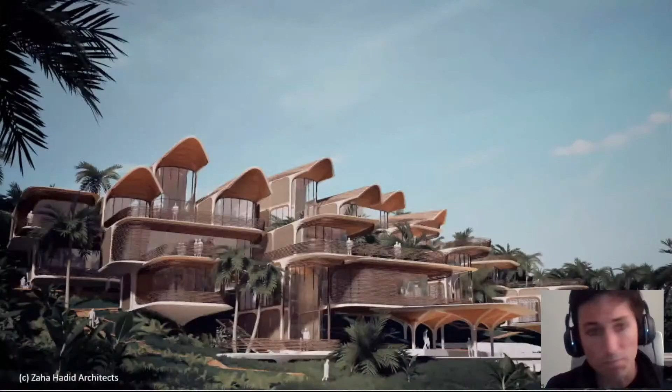Absolutely, sounds great, Jeff. So let me jump into it. So generally on our workflows, we tried, when in Zaha Hadid, we're very design oriented, right? So we try to make sure that all the outputs look great, and then how can we curate those outcomes? This is the project that I was mentioning in Roatán in Honduras.

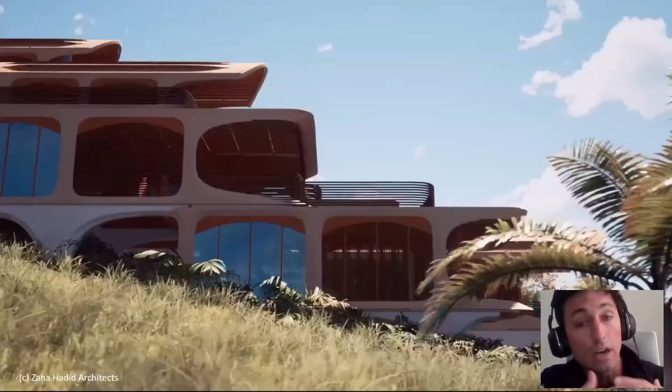So at the beginning, we kind of set up a scene, and Twinmotion in this case is where it really is great to set up something quickly and just get a feel of how that place would be. At the beginning, we don't really know how it's going to turn out. So this was the hypothesis with this project.

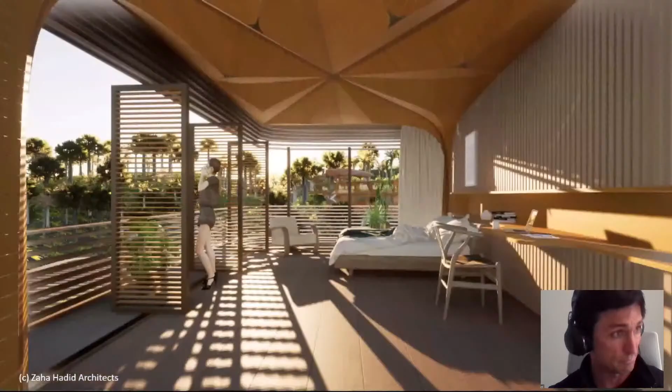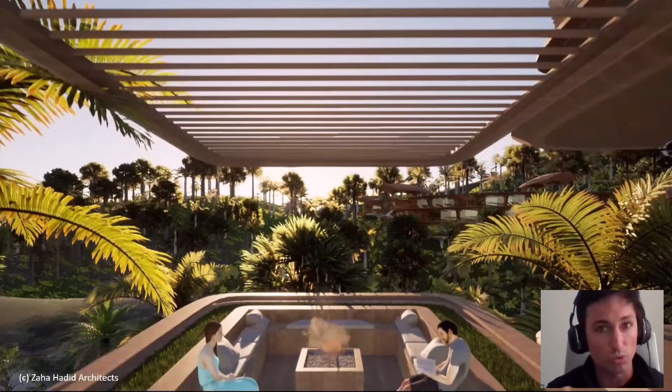Just trying to lay out some of the system design just to allow people to configure, but we needed to make sure that the mood that we take from the scene is curated enough to the standards of a Zaha design. So not only exteriors that we can control quickly with Twinmotion, we can also do all of these kind of scenes where you get real-time lighting and people dynamics, just to get a feel of that user participation.

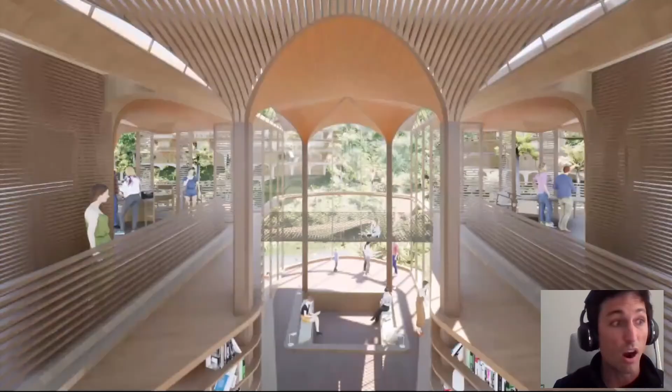That's what it's really most exciting, right? Like constructing those spaces, and putting ourselves in different times of the day on how we can appreciate the lighting conditions, and these game engines and Twinmotion are being really pivotal in those early design studies.

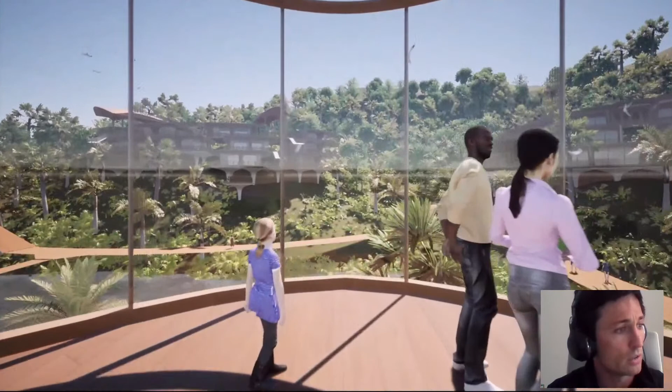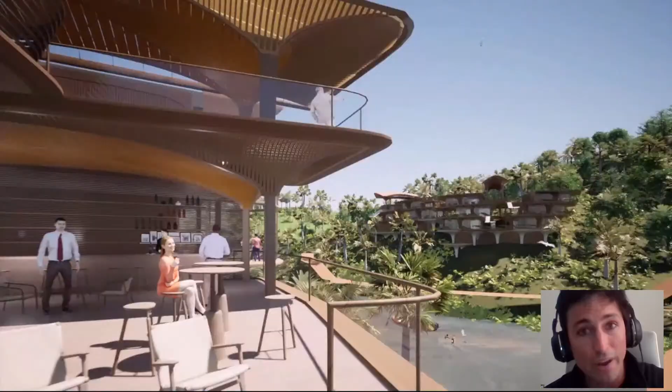So these are some previews of how we show it up in those early design studies, just to make sure again that we're capturing the right intention. After we have the actual feel, we then break all of these into a kit of parts. And believe it or not, everything that you see here on the screen is just a kit of parts. Everything is modular, so that's what makes it interesting.

Then how can we interface it, and how can we encode the rules to create not only the communities, but also make it available on our configurator. And then all of what we extract from the configurator is data that we can bring back to software such as Rhino or Revit in this case. So that's why we try to keep it a little bit agnostic in that sense.

So we lay out a little bit the system grid of that design intention, and then we voxelize all the space, all that initial. We run analytics, environmental analysis, views analysis, and how circulation and different types of units can work.

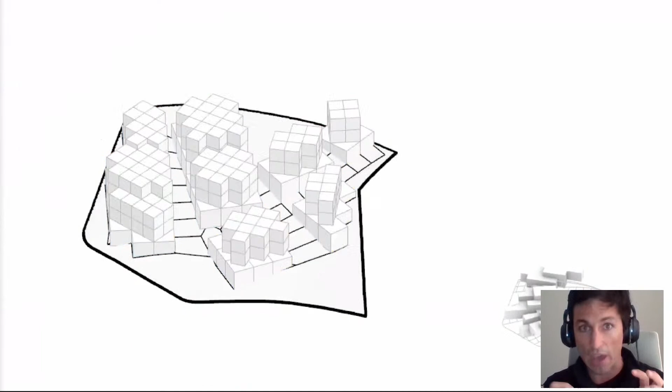So we can jump a little bit into a live show of how that configurator looks and how people on this island are configuring their units. Let me actually share, because it's all also made with Unreal Engine, and then we can plug in.

So this is cloud hosted. It's running on a local server right now, on my machine, but this is being deployed on the web. So I'm gonna put just Jeff -- let's make your unit, Jeff, in real time.

Yeah, so once we log in, I'm gonna have some instructions over here, and then we jump directly into the scene. So this is what's presented to potential buyers in this case, and then we can really adjust the scene very quickly, thanks to Unreal.

The first thing that they can choose is where the users want to place their cluster, like their actual unit, and then they can see, for example, this is another building that is going to be on site.

So whatever you see, the sea -- people can start actually understanding the distance to the sea, and the views that they are getting.

So let's say we want to choose that location, then people can say, okay, I want my unit to be on top of the stack. So let's select this one.

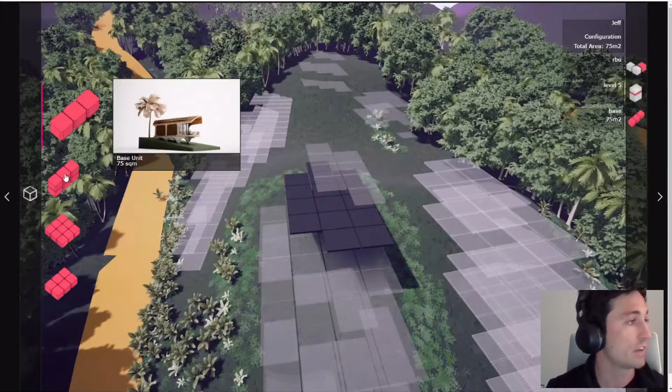Now I can start checking. I can choose between different types of units. This is a 75 square meter, this is a 150 square meter unit. Let's go with a wide one, maybe like 225.

That sounds about right. And then you see, depending on it, the system is intelligent enough that it shows you where you can place it, or where you're off limit.

So once we say, okay, now this one is I'm allowed to place here, it tells you already some data out of that position -- the distance to the closest building, the distance to the road, the actual unit area, and the distance to the sea.

So if people want to have a unit closer to the sea, they can also select that. And then once they place their unit, they can start also customizing air rights.

Like when we do this voxel, the system grid, they can also say, okay, I want to buy air rights for future expansion, so no one will be able to place above me. So I'm going to have my full terrace for me, or I can start adding some spaces on the sides.

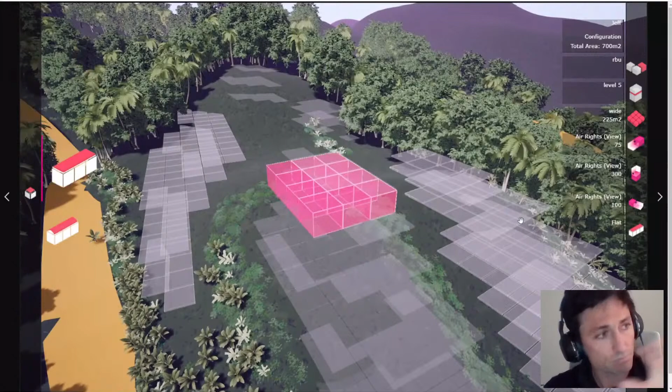Let's say I want to have only the left side because this side is clear, and I don't want any of my views being obstructed by anyone in front of me. So I buy all those air rights, and now I can get into the property, into the unit.

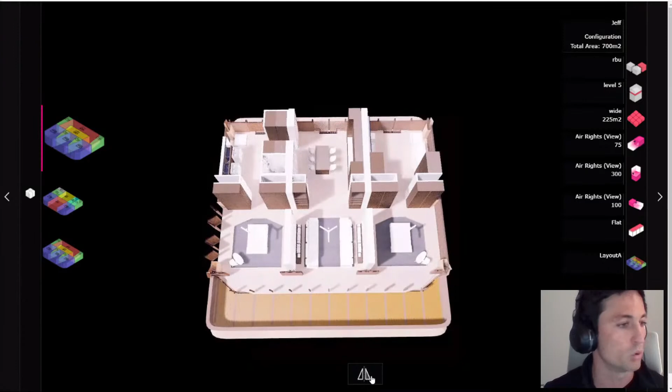So when we get inside, we can also customize the layouts, and depending on whatever they select -- let's say I'm gonna go with the first one, have some of the bedrooms facing towards the front. If they want to also flip the layout, they can do it from here.

And now once we get into the actual unit, they can start seeing how is the view from that unit -- I see there's no obstructions, I get a clear view on the right.

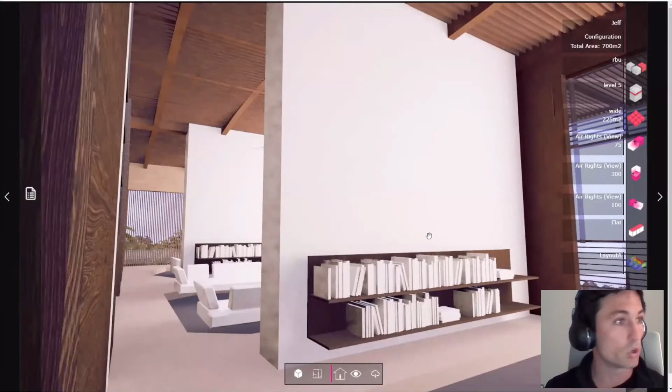Now I'm in first person, because again, this is almost like a game that I can start just walking around some of these units. And we can also go to the interior and see how that looks and start walking through. With Unreal Engine's ray tracing technology, we can have real-time lighting on the interior.

And then once the unit -- let's say Jeff is satisfied with this unit -- we can download that summary, and it shows it already downloaded.

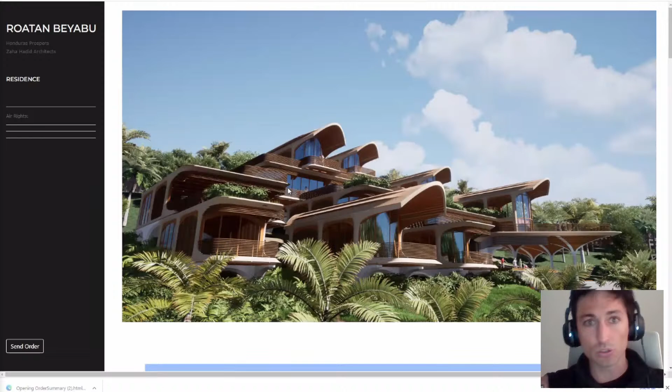Uh-oh, looks like we lost Cesar. I'll see if he comes back. I was checking out the chat while it's loading.

Stefan Pinedu, look at that. Nice last name, dude. Someone's asking if he's using Revit with Twinmotion. We can ask when he comes back.

That was definitely Twinmotion on the initial animations, and then the configurator is in Unreal, which there is... oops, sorry guys, let me just go to the 2K screen. We're gonna have to link them back in. Hopefully Cesar has no problems joining us again.

The configurator is running on the web using Unreal Engine as the backend, which I'll have to ask about. But there is a connector, a bridge between Twinmotion and Unreal, so you don't necessarily have to lose everything you did in those initial renderings and animations, as you saw there.

Check it out, let's see. I was checking out the chat while we wait for hopefully Cesar to come back. I'm wondering if maybe the Unreal thing broke it, but he said it was running on a local server, so maybe not. It's actually a Zoom call that him and I are on, so definitely something to do with potentially the Zoom call. Let me just keep checking out on here.

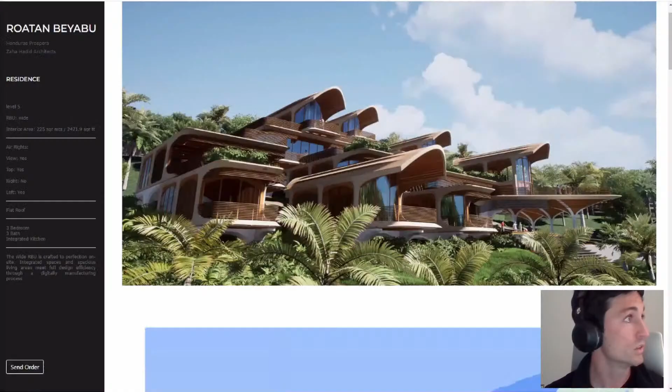All right, sweet. So we made my unit, and now you're running through a little summary here. After we did the configurator, we downloaded our order, and this is a brochure completely tailored to what the user said - like it's going to be on level 5 of the stack.

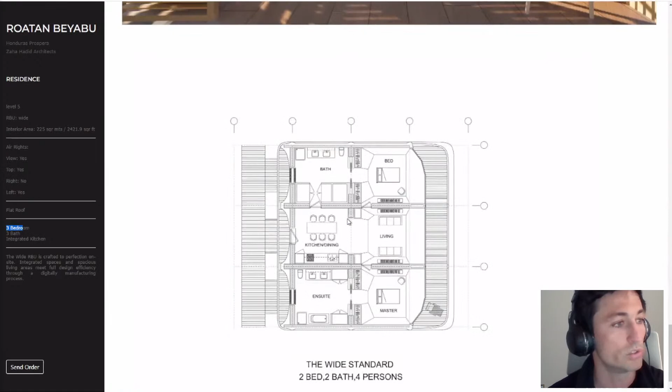It's a wide unit, 225 square meters. Then which air rights were bought, how many bedrooms and bathrooms are on that specific customized unit. There's also some information on the local site that the developer wanted to engage with, plus some conceptual images of how the unit would look in the interior and the floor plan.

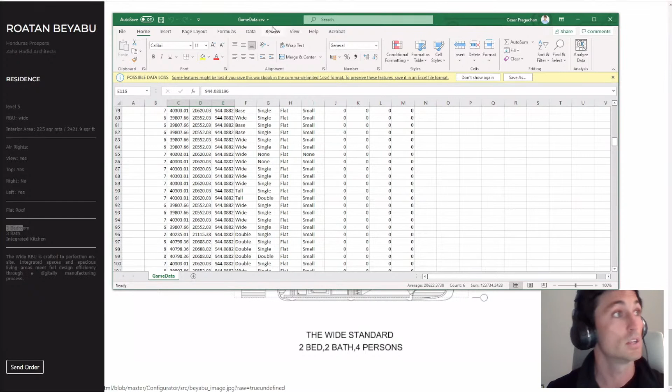So it's tailored, and what we get out of this is basically the data - different configurations run through different users, all encoded. So it's a wide single unit, with the transformation matrix, position and rotation of that unit. With this information we can reconstruct it and bring it back to any other software model.

Even when we start breaking down a unit, this is what I can share - just to understand how it looks. These are all the kit of parts that we model.

Based on that, they get swapped - if you want a large terrace, if you want a roof - all of that is deployed on the system. So this is a bit of that information.

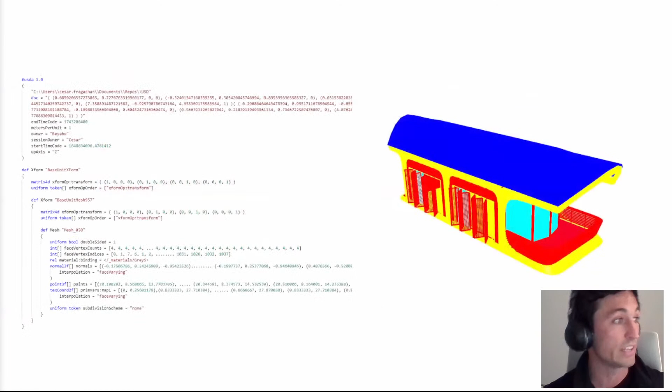This is the USD format we're currently exploring - from one unit that we model, this is the computational representation of that unit in space. So the configurator knows in the back end that if it has a yellow color, it will deploy it as a wood texture; if it has blue, it gives more of a thatched roof texture, and glaze in cyan.

With this kind of computational data we can start reconstructing everything. We can take it to the configurator, but we also export it back to Revit or Rhino, and continue refining it from there for structural engineering and whatnot.

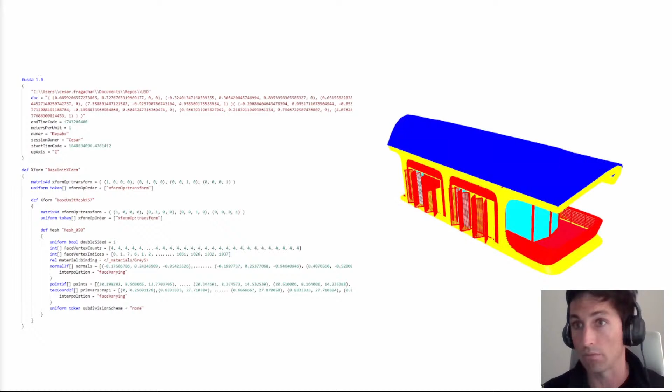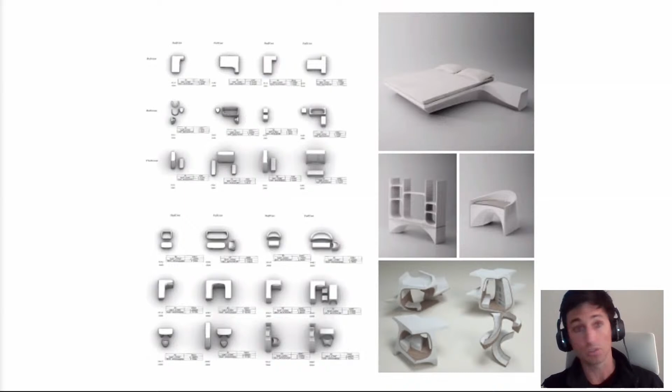And then of course, all of these are made available in Unreal, ray traced. This is a little bit of the configuration in place. We try to make sure that, I mean, we're architects, we're not experts in UI design, but it's something important. How do we present all of the data in a UI friendly format?

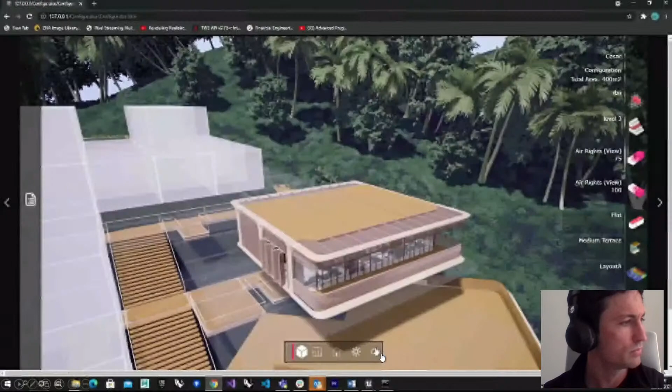Right, so real-time ray tracing. Some of these videos are not actually playing right now, but that's awesome. This is a little bit on how our workflows work.

No, that's great. It's an interesting approach in the sense that, at least in my mind, I'm connecting all these dots of how this changes the typical process. As an architect, I'm sitting there thinking this is a really cool idea, and obviously a space like this, I think you can probably enforce more rules initially on, is a simple example of it, right? Obviously the more customized the building gets, the harder something like this is. But then my question on the back end, the design process to set up these rules, what did that look like for you guys?

You obviously have to bake a lot of rules into this configurator. So was that something where that was mostly the architects, the design team themselves, saying these are the rules we want to bake in based on the typical design process? And then now let's hand it over to the users and say, how do they start interacting now that we've given them these rules? Is that kind of the thought process?

Exactly, just like that, Jeff. As you were mentioning, we're interested in having feasible and curated designs as outcomes. So for example, we can encode the voxel base to be intelligent enough that it could say, okay, a wide unit cannot be on top of only one single unit, or how much you can cantilever from the unit that is below you. So all those kinds of rules we need to encode as well in the process. Then if there are some clashes, it won't allow you to do that.

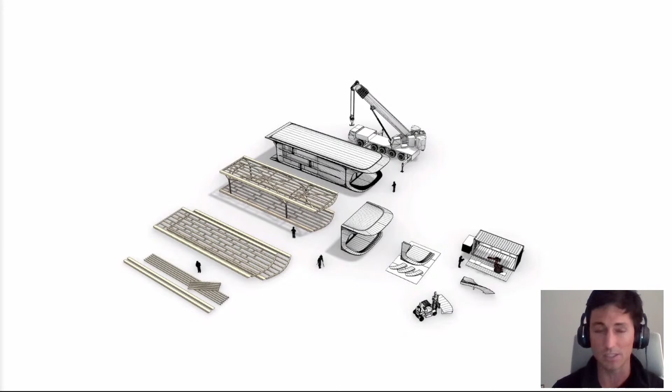So all of that design intention, how we stack, for example, this type of units are made of wood and are crafted. One of the things we take seriously is how do we manufacture some of these pieces? So we have a kit of parts, and everything is deployed locally using small machines, because it's kind of remote access. Everything has to be broken down into those parts. So the same way this is going to get built, we also need to encode those rules in the design process and the configurator to allow that feasibility at that stage.

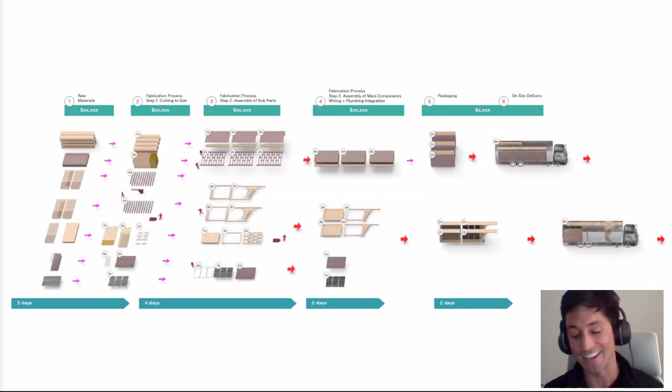Definitely. So this is definitely semi-prefabricated, semi-site-assembled, right? It seems like a kit of parts, like you're saying. So I have to imagine in this process you're engaging the construction end of it pretty early. It sounds like you're trying to build a lot of this information into the configurator even on the pre-construction, early design side of it, so that once these things are picked by the clients, you've kind of figured out all the solutions or results of their configurations, and then you're just, okay, here's the parts, here's how we make that unit, and so on.

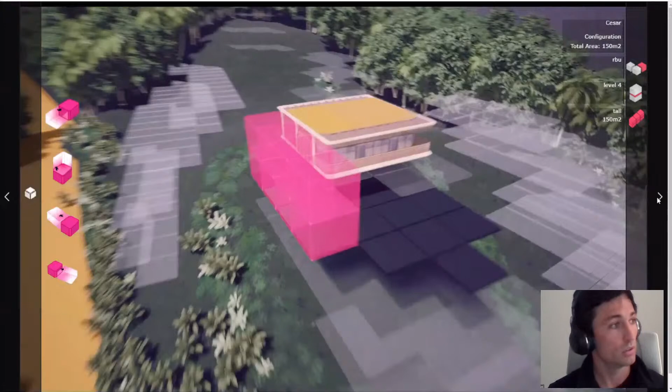Let's say we want to be next to him, and I'm going to pull like a tall unit to showcase a bit of how that looks. Actually, you know what, I'm going to also select, when I select the air rights from the top, then I can have an option to get a palapa, which is like these vaulted roofs.

So now if I select that vaulted roof, the system is smart enough to know if there's a unit above you, you cannot place a palapa. But if you didn't buy the air rights, you're also not able to place that roof. So that's the thing about how do we encode those rules architecturally, to make sure we have feasible designs and allow the user to configure and be part of the process.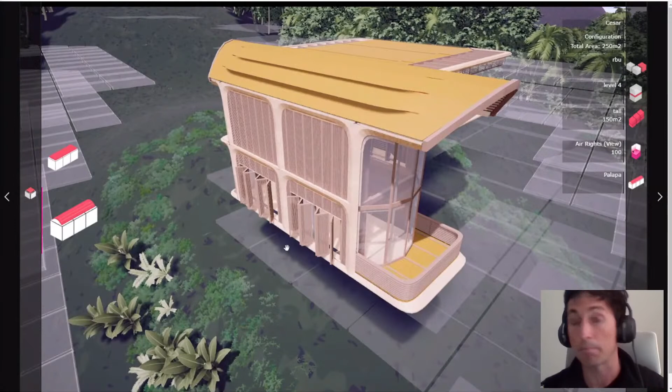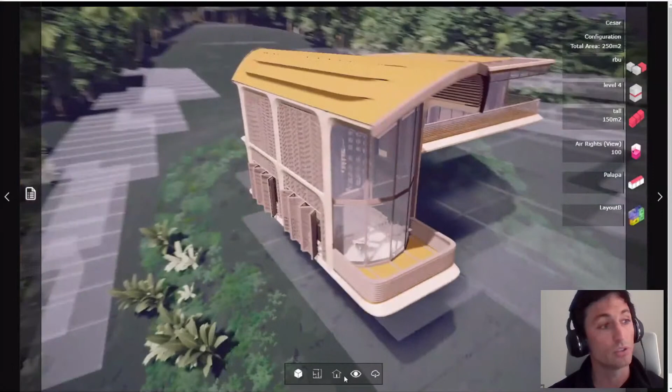So again, we can just enter and start selecting different types of layouts. This is what I'm going to go with, I think I'm going to go with this one. Go back again, and then you have a completely different unit now.

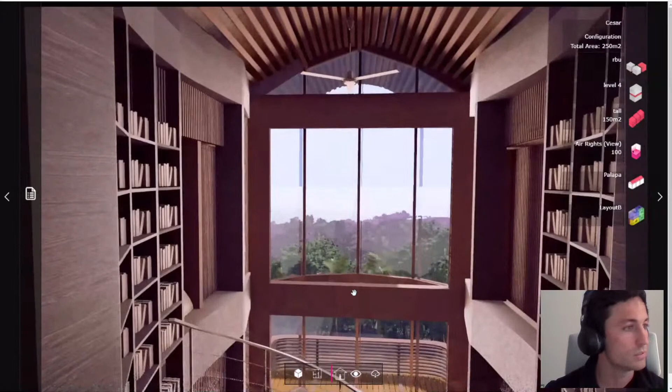We can just run it, and then we can come up in space, so you can start seeing how that space looks like. This initially has a double height, you can just walk and see how it goes. So yeah, it's a little bit...

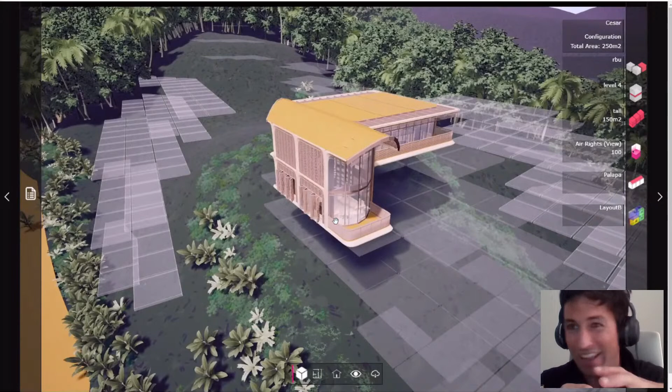It's trying to be like a first pilot project, just to understand what are the concerns and how we get it. Of course, in this way we've also realized there are some engineering constraints. Every time we do a change, sometimes this needs to get re-engineered. So how can we encode those rules at the early stage, the beginning, so we make sure all those outputs are feasible and available for construction immediately.

Awesome, I love this, and the community idea is fascinating because what you just showed there—if I'm Jeff who built that first unit, and then you come in and build this 2-story monster on the east of my view, then you're maybe hashing out some of these issues early, which I guess from the developer or owner standpoint is probably great too.

So I know, and it's interesting to see the game theory around it. A lot of these sessions with potential buyers, it's super nice to see the dynamics and who's actually there, and then they say, no, I don't want to be next to that person, I know he's going to throw some parties, so I'm going to go to the other cluster, I'm going to be a bit more quiet.

And then it plays out, because maybe you would think that the first one is the most privileged one because you have, hey, I can go to the top of that unit. But then I can put the unit up beside you and block the view. So sometimes the last person might not have the best spot, but he can choose between all the options just to make the best decision out of it. So the game theory out of it is also quite interesting, that gamification.

Yeah. Yeah. That's awesome. Yeah.

So tying this now back to sort of the initial theme of this gamification, using these tools, and then sort of, okay, now reality, we got to build it.

I'm looking at this and the architect and contractor are talking to each other, and I'm thinking, building all these rules and parameters within this configurator system is one thing, but when you're building these configurators, do you already have the manufacturing side of every variation ready to go, or do you wait till it's baked and then figure out holistically how to produce a manufactured level model or CAD file? Or are you ahead of time saying, here's our 6,000 options and here's 6,000 ways to build each of these options?

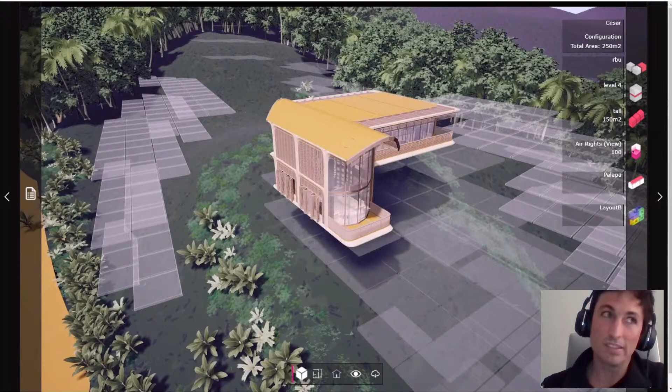So yeah, it's a mix and mangle. The problem is, all of this technology, in order to run it on the web, uses pixel streaming — it's not running on a client as a normal browser does. So on the deployment level, it was hosted on AWS, so that way you only get the pixels. But when you interact with the interface, you get quite a lag, because you click on the screen, and then that connects to an AWS server.

And there's some latency on that response, which is not ideal, so this has to be done in the front end using HTML, JavaScript, normal CSS—normal Web 2 developments. So the front end is there, and then it's communicated to the application that's hosted on AWS. You're creating a UI on the front end that's then attaching to the back end.

Awesome, exactly. A couple—let me just make sure I hit all the questions here while we're going along.

There's a couple of people that were asking about Grasshopper and parametric design, and it sounds like you did explain that. So I'm interested—why did you guys choose Maya over, let's say, Rhino for the initial modeling?

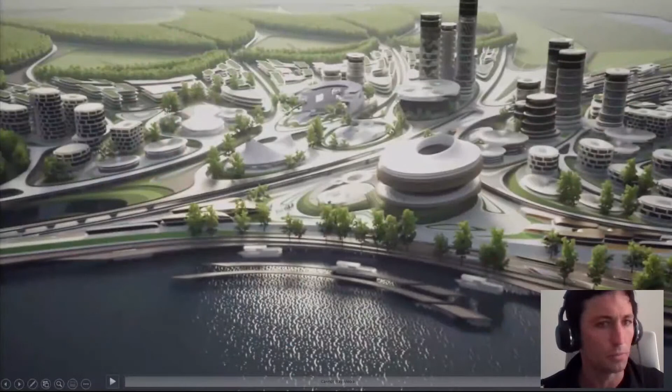Unfortunately I think this video isn't playing right now for some reason. I don't like it. So basically, this is a project we've been developing for Liberland, and having this also metaverse-ready is quite interesting.

How can we combine it? Because then we can start having a digital twin that people can configure properties on, and how can we have a manufacturing process on the back end that can construct that—but also live and create communities in this metaverse digital twin world. That's some of what we're exploring further.

I think I have some other videos, fortunately—classic, right, it's not playing when you need them. PowerPoint is really good at that.

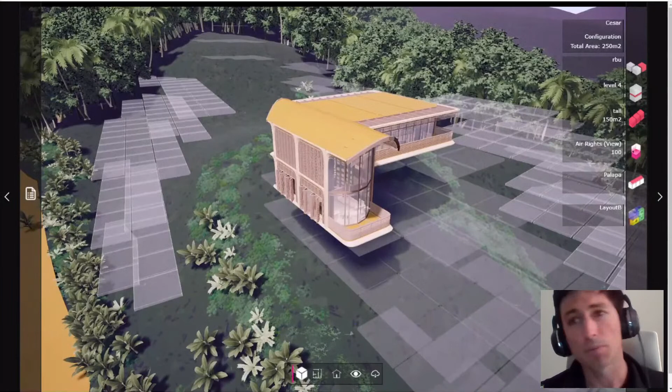But anyway, just having these ready for metaverses is also really exciting for us—how can we start mixing user participation, user experience design, not only with the real component, but how can we have that digital twin aspect where we can iterate and get feedback fast from that digital world and then bring it to life.

So that's where we're starting to get more and more into these metaverse-like projects, and we can test it—because once you do it in real life, that's it, and you have all the critics afterwards. But if you can test it in a digital world, a metaverse, you can say, oh, this is a problem here.

People are actually traversing here, and spatially it's not as nice as it would look. So without any cost we can iterate through it, and from those learnings we can make our buildings for the real world better. It's kind of like an informed decision between metaverses and real life.

It's quite exciting, we're starting to. That's a fascinating point. My initial thought of the metaverse was building within that environment and living in it, for that environment. But now it's an interesting thought that you could live in the metaverse version of your unit for a couple days. Exactly, and the end goal is still building a physical object, but you're using this concept to live in your unit and give feedback before anyone even builds it.